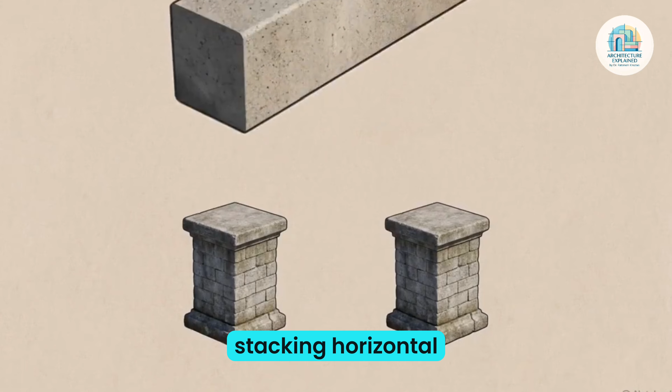This geopolitical rupture forced the surviving eastern state, what historians now call the Byzantine Empire, to invent a new vocabulary of structural engineering to assert its authority. To understand their departure, we have to look at the baselines they inherited. Classical Greek architecture prioritized exterior mathematical harmony. Builders used a simple post and lintel system, stacking horizontal beams directly on vertical columns, which resulted in dark, highly restricted interior rooms. The Romans bypassed this limitation by mastering concrete and the semicircular arch.

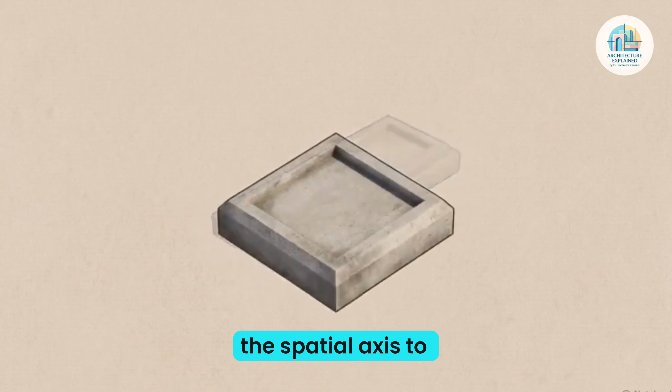By interlocking arches into vaults, they shifted the architectural focus inward, engineering massive civic halls designed to enclose hundreds of citizens. The Byzantines inherited this Roman emphasis on the interior, but they rejected its geometry. Instead of a horizontal march from the door to the altar, they re-engineered the spatial axis to draw the eye vertically upward. Sustaining a new millennium-long empire required new borders. It also demanded an entirely new structural vocabulary to physically manifest its shifting ideological priorities.

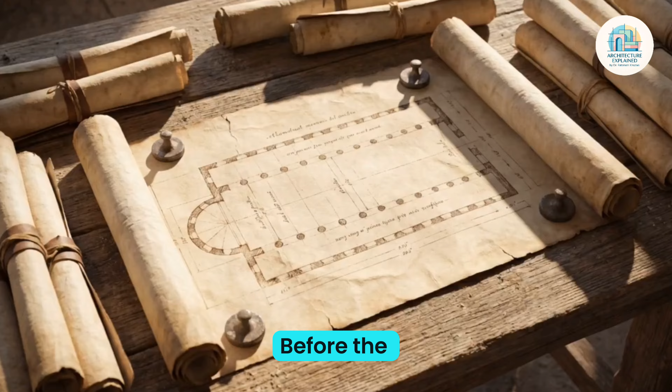Before the Byzantines centralized their space, early Christian builders relied on the Roman basilica blueprint. This diagram shows the floor plan of Old St. Peter's Basilica, a longitudinal layout built around a central rectangular nave flanked by side aisles. Entering the narthex, worshippers are forced into a linear progression down the axis, terminating at the eastern apse.

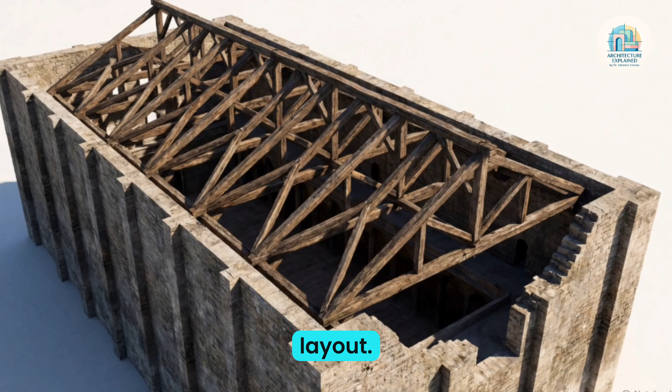Gravity presents the primary structural limitation for this layout. Spanning a massive rectangular nave required a heavy timber truss roof. To prevent the roof from crashing down, builders had to construct thick, continuous stone or brick walls running the entire length of the building. These load-bearing walls had to be dense and solid, severely limiting the placement of windows. The Roman basilica excels at directing a crowd linearly, but its reliance on heavy, continuous masonry severely constrains both spatial volume and natural light.

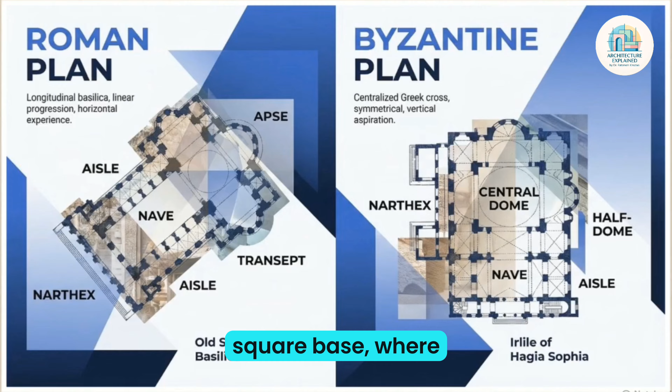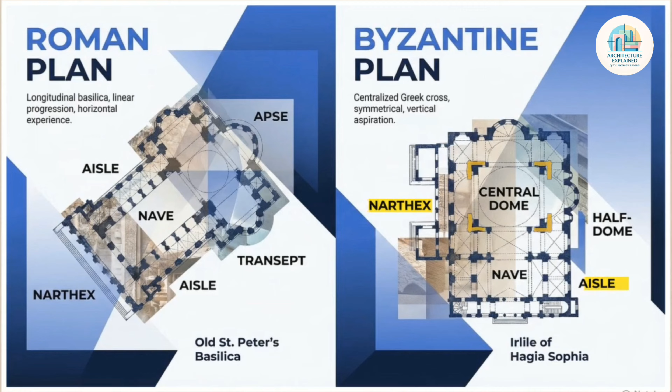In 537 CE, Emperor Justinian commissioned a building in Constantinople that replaced this linear tradition with a centralized volume, Hagia Sophia. This diagram shows Hagia Sophia's centralized floor plan. It forms a symmetrical square base, where the main hall and crossing arm intersect into a massive central bay. Traditional elements remain. The narthex and aisles wrap around to buttress this central mass. When a worshipper steps into this centralized void, there is no long corridor to walk down. The geometry instantly forces the eye upward toward the void overhead.

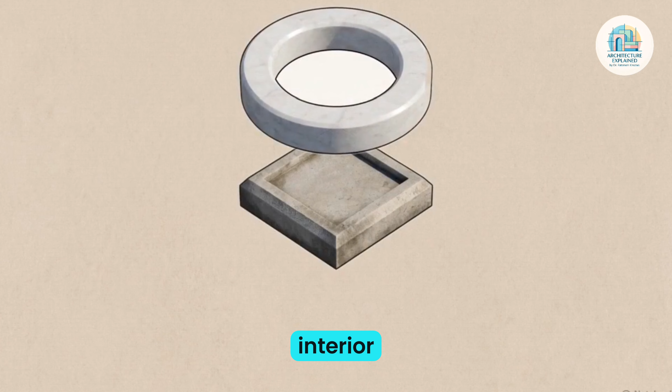Setting a massive 31-meter circular dome over a huge interior space creates an immediate engineering paradox. How do you safely place a circular rim onto a strictly square room? Previous Roman engineers, like those who built the Pantheon, solved this by resting the dome entirely on a thick, continuous circular drum wall. A circular drum, however, prevents the room below from expanding out into a square. Pushing a centralized space outward into a square meant the dome could no longer rest on continuous walls. This crisis required a completely new mechanism for bearing weight.

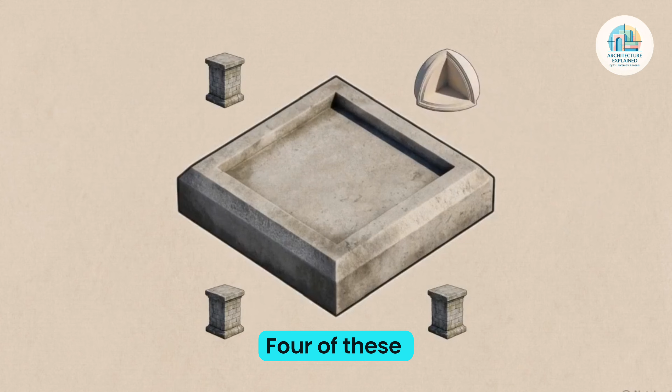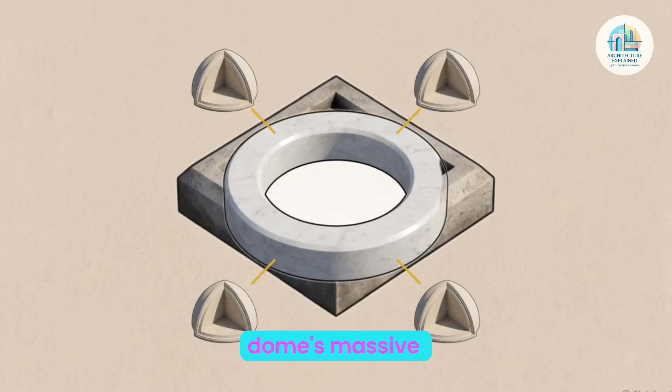The Byzantine solution to this structural dead end was the pendentive. A pendentive is a concave, triangular section of a sphere. Four of these curved triangles bridge the corners of a square room, forming a flush, circular base. They act as funnels, intercepting the dome's massive thrust and driving it strictly into isolated corner piers.

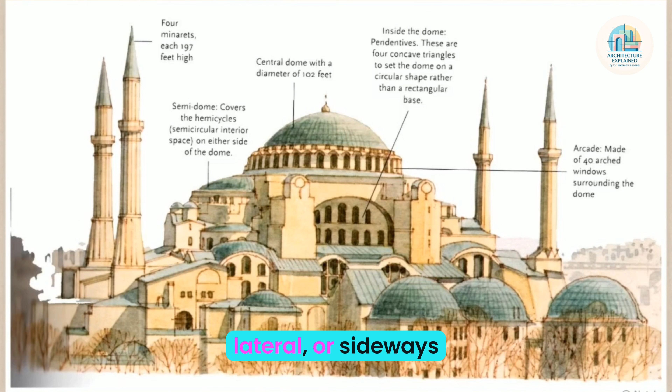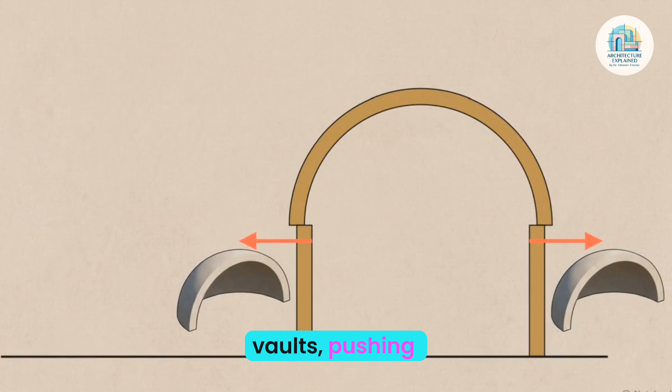This diagram shows the exterior of Hagia Sophia. To prevent the lateral, or sideways, forces of the central dome from bursting the structure apart, engineers added a secondary support system of massive semi-domes. These half-spheres flank the east and west sides of the building, acting as giant bracing vaults, pushing back against the outward pressure of the main dome.

Since the roof load is gathered by the pendentives and driven strictly into four massive pillars, the flat walls between them carry no weight. By isolating the load into discrete points, Byzantine engineers decoupled the walls from holding up the building, creating a vast, unencumbered spatial volume. The immediate result of the pendentive system is that the masonry directly below the dome becomes structurally obsolete.

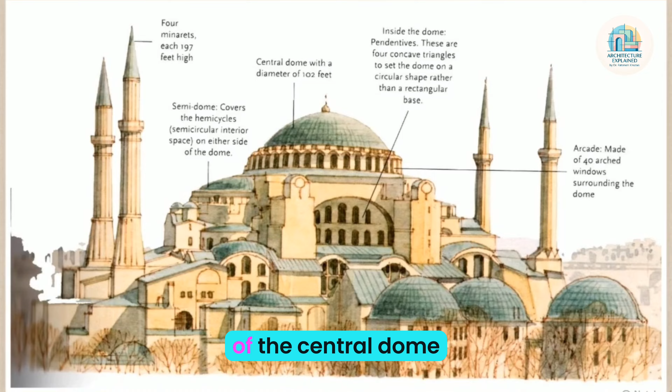This diagram highlights the base of the central dome. Because the pendentives handle the load, architects could safely pierce the lower rim of the dome with dozens of voids. From the interior, these 40 windows create a stunning optical illusion. The 31-meter dome appears entirely disconnected from the masonry, floating solely on a continuous ring of light. This intense light served a specific programmatic function. It illuminated the vast interior surfaces that were now available for sacred mosaic art.

Following a period of religious prohibition on images, known as iconoclasm, elaborate figurative mosaics filled these spaces. The Deesis mosaic, located in the upper gallery, depicts Christ flanked by the Virgin Mary and John the Baptist. Byzantine artisans executed these works by embedding millions of small gold glass blocks, called tesserae, into the wet plaster. Instead of laying them flat, they set them at slight, irregular angles.

When the shifting light from the window arcades hit these uneven glass surfaces, it created a shimmering effect. As a viewer moved, or as candlelight flickered, the static figures appeared to breathe and animate. Byzantine architects solved a rigid mathematical problem regarding weight distribution. In doing so, they constructed an environment where precise structural mechanics manufactured a distinctly divine atmosphere.